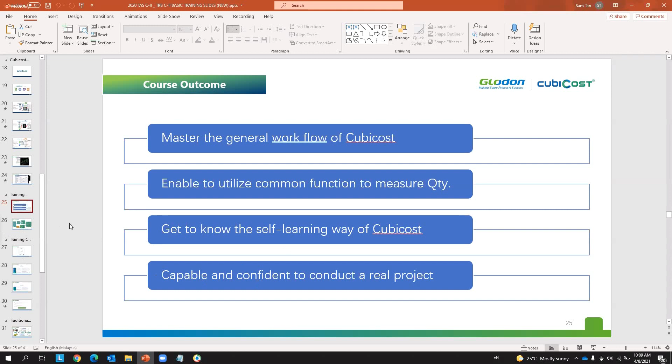Right. So for this 3 days training, our first day we will have the, there are some typos here, sorry, it will be TAS. We're going to start from our TAS software for the first day, and in the afternoon we'll do the main elements: column, beam, slab, or even wall. It depends on our progress. First day it will be TAS.

Second day afternoon it will start from our TRB, for our main structural elements. To emphasize again, the first day will be TAS until the second day morning. For the second day afternoon we will start TRB, and the third day will be a model submission. We need to remodel everything we learned today and tomorrow. The drawing will be the same that we practice for day 1 and day 2.

So for day 3, you need to create everything for the project from scratch. Create a new project and then do it accordingly. There will be some references you might need to see, for example, for columns, you need to prepare at least how many columns for that particular unit. And also we have some quiz. You will need to submit on the third day, and we will evaluate. We will provide you the certificate within 3 months.

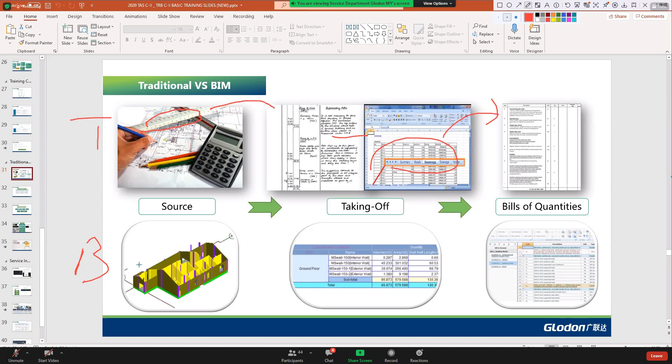Okay, how about BIM? For BIM, if you have CAD drawings, you can identify everything. You can do the model, or even if you have the Revit file. If some of the projects have the Revit modeler, you can actually import the Revit to our Cubicost software, and then the model is actually there. Voila. But we need to check

on the pattern of the BIM modeler model, because the BIM modeler is not necessarily the QS pattern. Some of the QS rules of thumb to do the verification will be missed out by the BIM modeler. Take example, if you have ground beam or frame beam, the concrete and formwork of the ground beam will take precedence. For frame beam, it will take until you see some steps back.

So some of the BIM modelers won't cater for that particular thing. It will just straight away draw the full length of the slab, for example. So you will have the wrong quantity allocation in ground beam or slab already. This kind of situation. So once we import it, we can do the necessary amendment. Then the software will automatically calculate the quantity if the SMM2 or MySMM calculation rules are valid. And then we can do the back linking to the BQ.

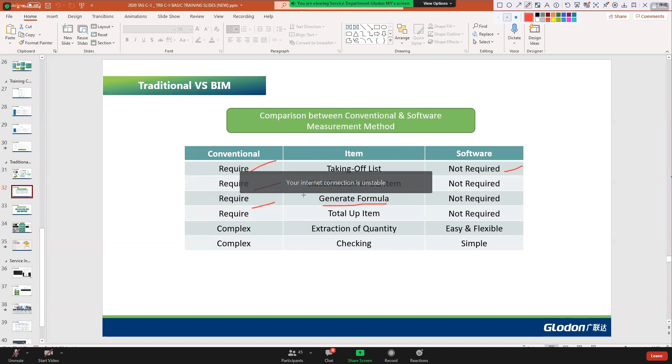required classification in BQ item. Conventional, yes. Generate formula, yes, for conventional, right? In Excel, you need to set your formula yourself, and software not required. Total up item, conventional, yes. Extraction of quantity will be complex for the conventional, quite easy for the software. Later I will

Excel sheets, and then which row, and then you need to double click and check the formula, and then find back your cell name, right? So that one will be quite confusing. For cross-check it will be quite simple. We have a reverse checking function for us to check. And also some benefits of using the software. I'm not going to say more.

Reduce the wastage during the construction. For the contractor, reducing the wastage will increase the productivity and also the profit for the whole project. Eventually reduce the wastage and high efficiency productivity.

Security wise, it means only whoever has the license is able to open the software. If this file is sent to a third party, for example a competitor, and the competitor doesn't have this software, he or she is not even able to open the file, right?

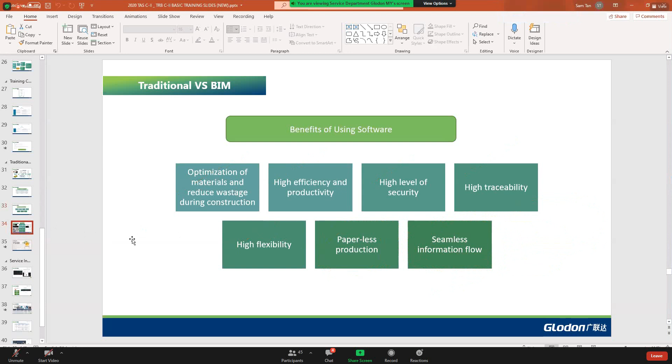And seamless information flow. Information flow will be seamless to everyone. Right. So we are coming to an end. We are going to operate our software. Before that, there are a few items to take note of. Every time in training, I actually want to emphasize this to my trainees. This slide is very important.

The first thing, you need to study the drawing. You need to know the drawing sources, whether it's IFC, Revit, CAD, PDF, or JPG. Each different type of drawing will have different methods for doing the modeling. I will show you later on what the different types of drawing and details are. It will be very important.

Categorization of the items. You need to know what elements you want to do. Type of rebar used, this is very important. You can check from our general notes. The whole layout plan, structure and architecture.

I like to describe structural engineers and architects as being like boyfriend and girlfriend. During, for example, a technical meeting, they don't like to talk to each other.

In some of the layout plans you will find there are some differences between the structural engineer and the architect. So you have to make sure which is the correct layout you're going to use and which one is the latest revision.

And general notes. I presume as a QS, you all know that before we start to do any measurement, first of all, we need to read the general notes carefully. All the generals will be uniform. For example, you will receive some layouts that say unless otherwise stated, UOS.

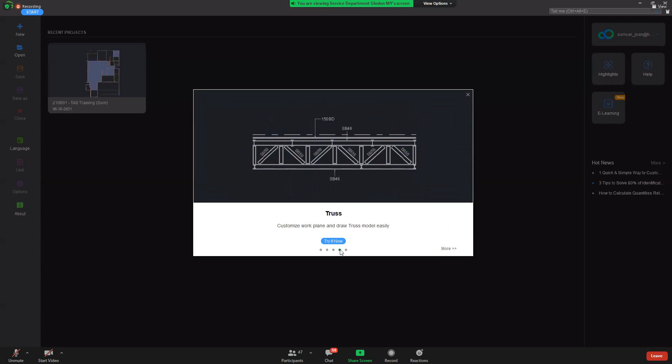And if you click on the highlights, you can see the e-learning. You can try the view function. Okay, we have some clusters, revision function, Revit changes, etc. Then you can click on more, learn more, right? If you click on this more, you have a tutorial. Okay, if you click on this help, it will go to something similar to a help desk.

Okay, if you don't want to click on this help desk, press F1. If you press the F1 key, it also takes you to that particular help center. Okay, and also this is our new one, the e-learning. This e-learning is actually free video, and in fact you go to our Glodon Teachable. Go to our Glodon Teachable, right?

So there is some hot news, some sharing on how to calculate the quantity related to site of the opening, tips, some of the identification, and what are the simple ways to customize that. Okay, so you can explore more on this.

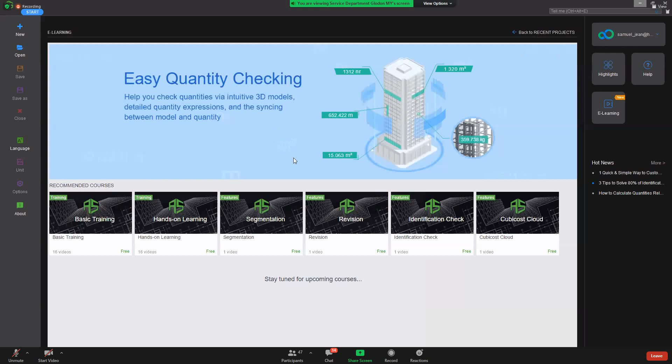First of all, what you need to do is create a new project, right? Everyone, please create a new project. Let us put today's date in full form, and in brackets, my name. Create the project name. Select the measurement rules. In your case, it will only have the Standard Method of Measurement second edition, right? In the temporary license. For mine, I have the MySMM. You use the SMM2.

Metric and imperial depend on your project. If your project is US or Taiwan or Indonesia... most of our projects in Malaysia actually use meters. Just remain as the default. And the ground elevation, this is what I'm going to explain to you further, because it's actually something to do with our excavation. Then we click on OK. Once you set your name, the standard method of measurement, metric, remain at 0 for the ground elevation, and then we click on OK.

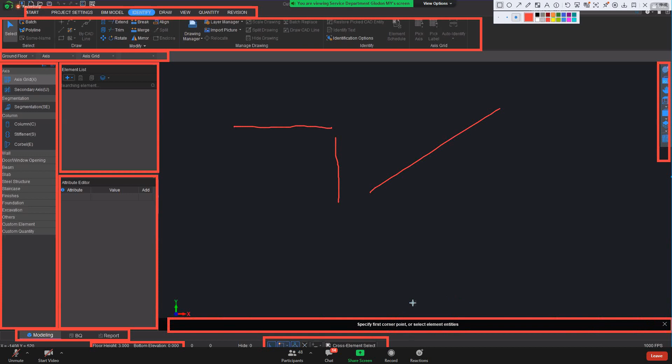We have this called the status bar. If you perform an operation, there will be a next operation step asking you to perform, so you can refer to this operation status bar. If you accidentally close it, you will come to this bottom area. If you want to open it back, just click on this blue color and it will come back open.

You will see there's 1000 FPS - this is what we call frame per second. The software is actually treated as something like gaming software, so it requires a certain quality of the graphic card of your PC. There will be some requirement on the graphic card, or also your PC RAM, etc., to run the software smoothly.

So let me go back to the start. I am able to save as, close, and set options as well. At the start here, let's go into the options. From here, there's one thing very important, which is on this file we will have

a backup, and also the auto save prompt. Normally I keep it on auto prompt, meaning every 15 minutes it will prompt whether you want to save the project, and I click yes. For training purposes, I would like everyone to save our project file on the desktop PC for us to find - save yes, and then the backup file. Once every 15 minutes it saves, there will be only one file created and updated.

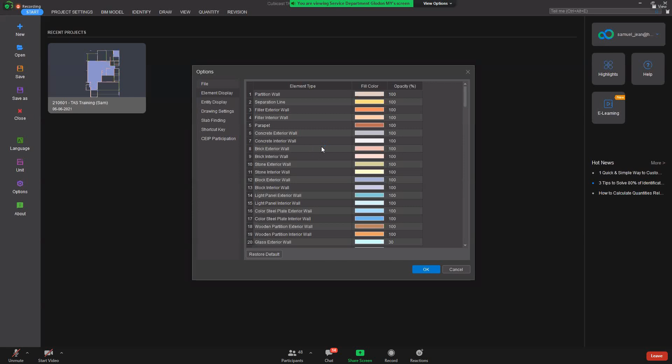Which elements will have default colors? Some companies have their own SOP - for example, they want walls to be orange color, columns to be maybe blue color. This makes it easy, so for every project there will be a similar thing, and the management or superior will be able to recognize this one as blue color, that one as another color. It depends on your company's SOP - feel free to adjust accordingly.

However, for entity display, everything - drawing settings, slab finding - by default everything will be reset in the software. And the first thing we're going to do is the project setting.

As I mentioned just now, I keep emphasizing - our project goes from left to right. We need to set our project information and our floor heights, and if we have our IFC, just now I mentioned, you still remember IFC, Revit, I can do it. And then for this one, this is where we can import our drawing, to identify that. For the draw tab, we're going to draw everything manually.

And after we draw the model entities, we can view them in 3D, 2D, faster 3D, etc. And then we can calculate and view our expression and our quantity mathematically. Later we're going to show you the function.

And in the quantity section, you will find measurement setting and measurement rules. So you will understand our setup - everything we set as M2, everything will be in accordance. You will ask me what's the difference between measurement settings and measurement rules. Let's open the measurement rules - measurement rules is somewhere that relates to the deduction.

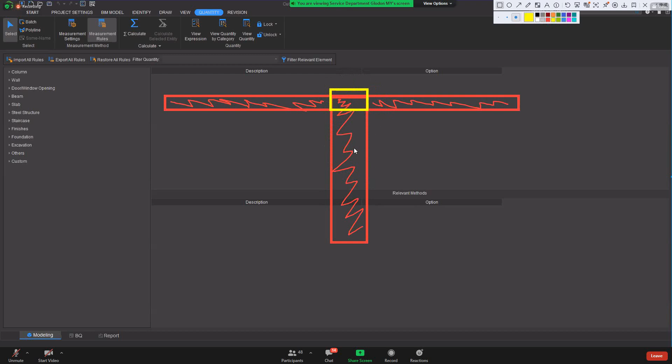Automatically in the software, for example for beam or slab, we will detect full volume minus this section. This section will be solely for the column. Remember, everything in the vertical element will take precedence.

So this is where you can set, for example, I open it for the column. You can see everything, deduction of the lining from the specific column. By default it will be according to the SMM, but if you want to change it, you're able to change it from the drop down.

Right, so let us try to set our project information first. In the project information, the project name and rule have already been set. You cannot amend anything already set.

Project code, let's say I put it KL001. If you click the project type drop down, you are able to see residential, factory, office. I'll put it as residential.

So you will ask, for today's training, what are the things, what are the models that we're going to do, right? Okay, let me write this down for you.

So for today, we are actually going to model a bungalow, which consists of a ground floor and a first floor. It's actually a rectangular bungalow, a rectangular shape.

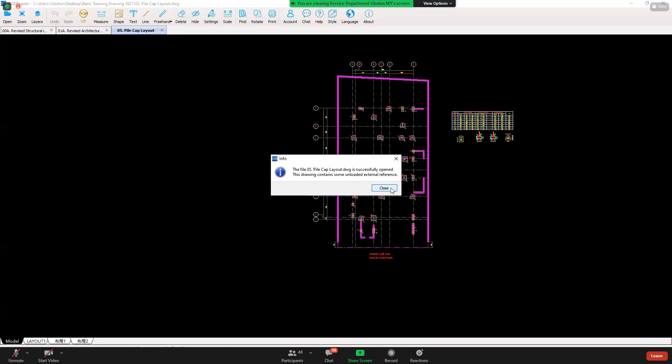For the foundation type, we are going to choose the pad foundation. If you refer to the drawing material, we actually have pile cap.

And the number of underground floors — we have one, which is our foundation floor, and the overground floor will be 1, 2, 3. Let us put 3. This is the brief information we can set, don't worry about that.

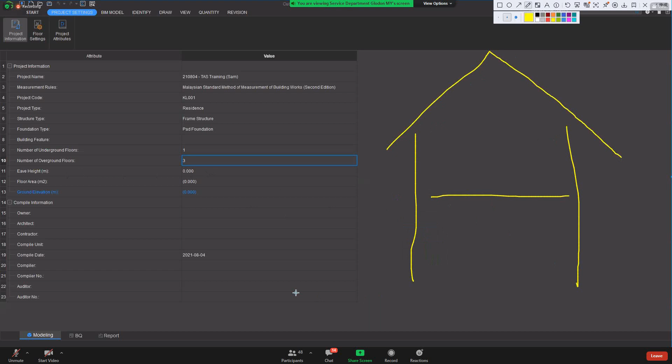How about the eave height? Let me draw it. Let's say this is the overall building roof, this is the floor level, and this is the ground floor. Eave height is actually the distance between the tip of the roof and the ground floor. This is what we call inside, right?

So in this, I'm not going to put anything because it carries no meaning for me. If you have the information, you can put it, but I'm not going to put it for the training purposes.

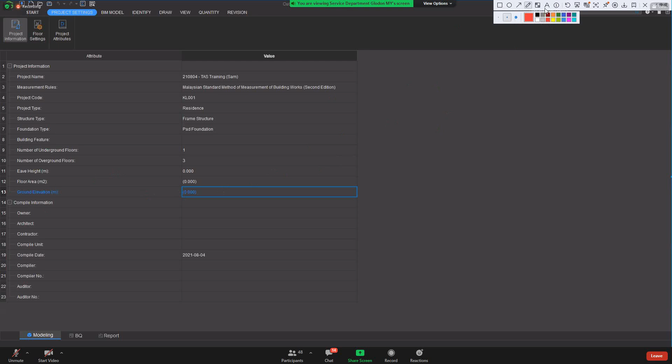Floor area as well, you can put it. And this ground elevation — what is this? This is actually a function for you to determine your excavation. This ground elevation is the starting point of your excavation level. I repeat, it's the starting point of your excavation level of the ground elevation here.

So for this ground elevation in the drawing, can everyone let me know what is the ground elevation for the project? Leave me a chat box, leave me a message in the chat box. Guys, let's guess, okay? What is the value for the ground elevation I need to set in the software?

Anyone? Is it 83.4 or is it 83.2? Okay, CE type. Okay, CE 83.2. Yeah, okay, yes, you guys are on the right path.

This 83.2 will be our ground elevation. Oh sorry, I just closed the autosave prompt. I think you all also at the same time will receive the autosave prompt, so just save it. Save the file on your desktop, easy for you to find.

For ground elevation, we put it as 83.2. And for the information, the owner, architect, contractors, compile unit, compiler - I'm not going to do anything there. You can also put in, for example, the owner will be this company as a class. Make sure the part is the blue color one.

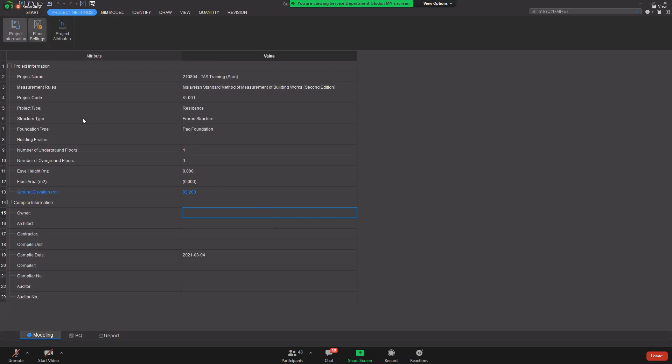For this floor settings, on the left hand side, this is what we play around with for zoning. Meaning to say, if you have a project - remember just now the condominium - I have two blocks and maybe a podium, I want to separate into different QSs to do the work. I can use this zoning, and then they can merge the file together.

So this one you can set the floor height and grid setting. Remember just now the item for you to take note: you have one thing we call general notes. As per your project, if the general notes on every element, please follow accordingly to fill it in, so that you get the information accurately.

So for the first one, let us see what we have. We have one foundation floor - this architecture building is going to provide foundation floor, and we have ground, first, and roof. So how can we set it? By default, the software will have foundation floor, ground, and first.

If you add this, click on insert floor, it will insert the basement floor. If you want to delete, you need to click on this basement one and click on delete. You are unable to delete the foundation floor.

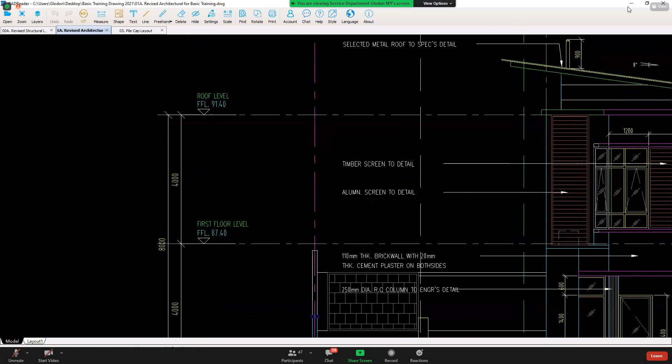I add minus 1.5, I will become 81.9 meter elevation. Let us cross-check - the most is 91.4, which is correct. So remember the elevation.

When I come to elevation, some of you might be confused. Later on they will actually see the entities - they have the entities elevation, top and bottom elevation. What did that mean? Let me show you a diagram for you to visualize.

Remember just now, for example, ground floor is 83.4, and the 4 meter height of the floor, it will be 87.4. This 87.4 will be the first floor bottom elevation, and it's also equal to my ground floor top elevation.

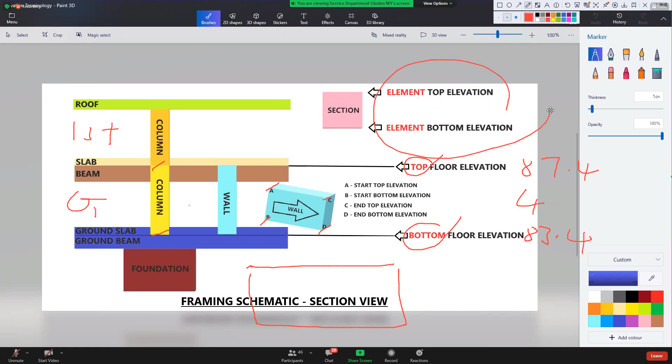Okay, we have a question from Wong whether we need to change the floor height for the roof. Right. So for the roof here, because the roof floor will be our last floor, the floor height carries no meaning. You just remain at 3 meter, because the roof floor will be our last floor, so there will be no other element on top of it.

Okay. So another part is this one, the grade setting. As per the general notes, you can set, for example, concrete wall is grade 40. Okay, I need to change to grade 40. There will be a different color indicated. You need to change this. And you can change the concrete category, the small work type, and also the mortar grade.

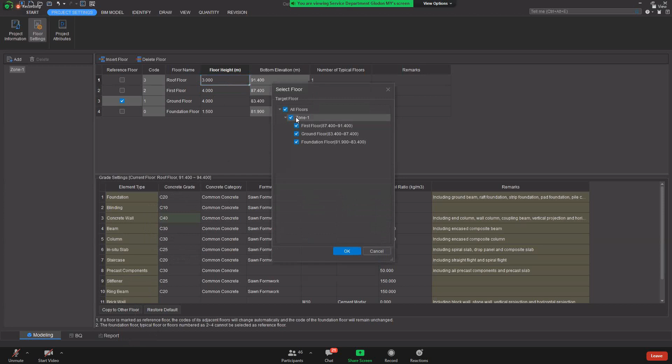And then, for example, now I'm changing the roof floor. If it's applicable to every floor, I just copy to the other floors. I select every floor and I click on OK, and then every floor will be the same. So for this grade setting, there's nothing specific for you to set, don't worry about that. Just sharing with you the function that you can use. If you want to restore the default, you just click on restore to default.

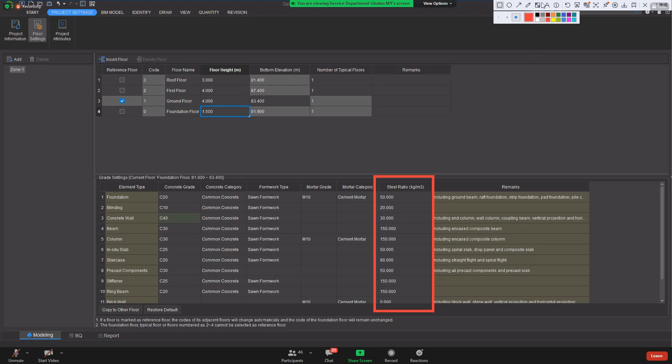Steel ratio here, don't get me wrong, is actually an estimation, a guesstimation of the steel weightage derived from the total volume of concrete. Right? The cube. So if you get the total volume of concrete of the element, you times it with the steel ratio provided by the engineer, and you get a rough estimation of the rebar tonnage, the weightage.

Okay. So once we're all set, the first thing we need to do is import the drawing. Currently we have our drawing in our import folder. Firstly, we click on this drawing manager, and on the right hand side there will be a drawing manager and also a layer manager. I like to open the layer manager together.

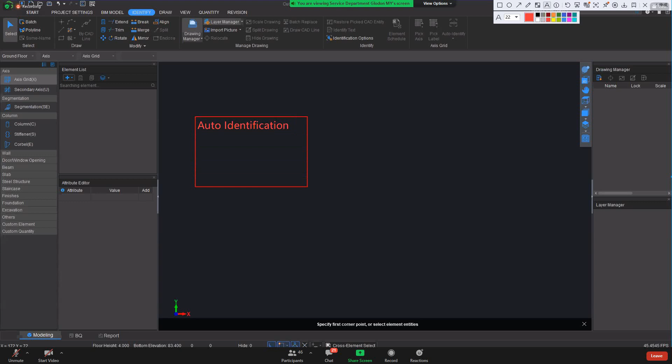I'll explain the manual model first. In the manual model you need to create, for example, a column. You need to create the entities for the column: for example, the name, and then you put the length and the width and also the thickness of the column, and then you use the point function to place it according to your drawing. This is what we call the manual way.

The auto identification way will be very straightforward. Later I'm going to show you the operation steps. It will be only 3 steps: you need to pick the axis, pick the label, and then the auto identification. Okay, I'm going to show you these two.

So before I start, we need to have our drawing inside our software. So click on the drawing manager. Everyone, please click on the drawing manager. It will appear on your right hand side here. How do you add the drawing? You click on this. Some symbols you may not be familiar with. You can just move your cursor to that particular symbol and you will get a prompt saying it's actually add drawing in this case. Click on add drawing.

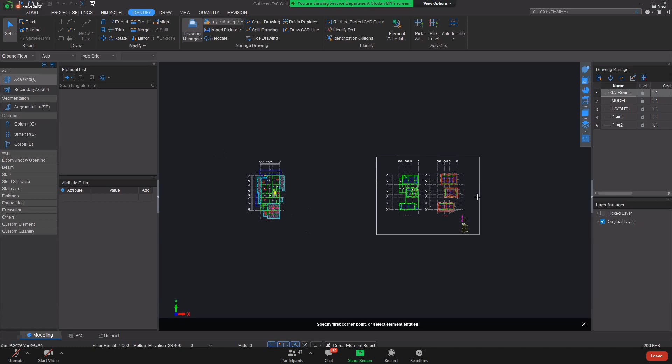While you are downloading, let me explain to you. So we have these three different types of layout. The first thing you need to do is split the drawing into individual floors. Why do I need to do it? I'm going to explain to you. Once I split it, I will have my axis grid line. Later on I will show you the axis grid line I created here.

For example, once I split this one, this one is the ground, this one is the first, and this one is the roof. I will need to relocate the drawing to the exact coordinate, to the exact point here. So for the ground floor, I will have the x and y axis, the axis grid, and the first floor I also relocate to the same location, and the roof as well. Meanwhile, the axis grid line will serve as a baseline for us to do the model.

Meaning to say, if I do the model and I separate it into sections, my ground, my first, my roof, if I didn't have my axis grid line and I didn't relocate my drawing to the appropriate axis grid line, what do I do for my vertical element, for example, a column? If I don't have the axis grid line, I have no point, I have no benchmark to relocate it. So my column will be out of position.

For example, let's say this is C1 and also this is C1. That will be totally not making sense, right? So what we need is to have the axis grid line. The first thing is split the drawing, and then we relocate the drawing to the axis grid line, and then when we do the model for column 1, we will have the same verticality for the C1. This is the result we want. We want to see if the model is reasonable or not.

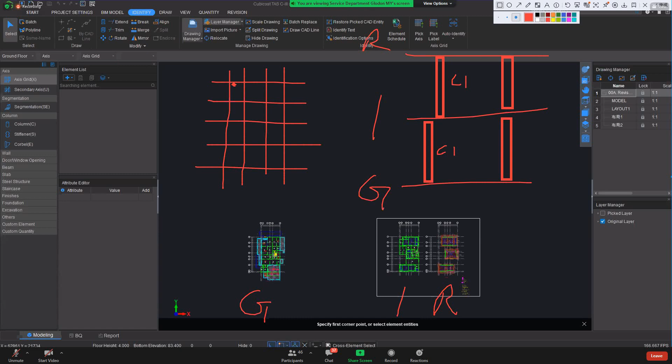Okay, if you're clear on the purpose of the process I'm explaining just now, from splitting the drawing, then creating the axis grid line and relocating it, the ultimate outcome is to get the verticality of the vertical element. Please leave a yes in the chat box. I want to make sure everyone is on the same page and everyone knows the concept of this modeling. This is very important.

I have actually encountered before some users who don't have the axis grid line, so when they do the model and you see the 3D, it will be messy every time. Right? Okay, nice. Everyone is on the same page, right? Correct. Okay, so let us zoom out.

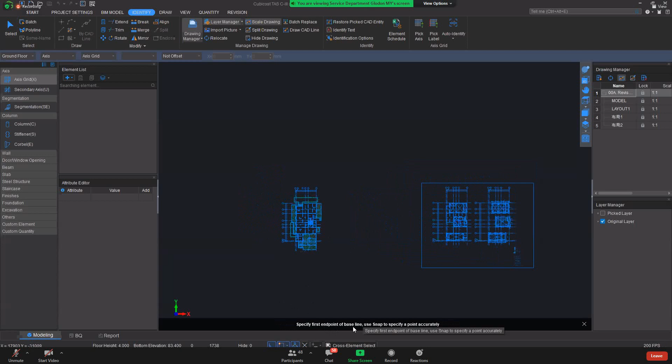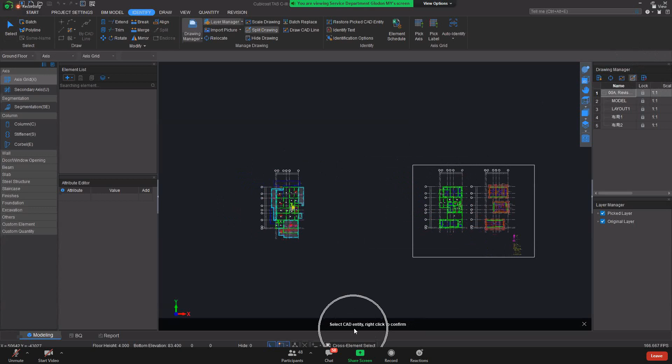Once we're done scaling, the next step is very important: we need to split the drawing. Let us click on split drawing. Similarly, refer to the status bar, which asks you to select the CAD lines. First, zoom in. I left click, hold, and drag over the whole layout for the ground floor. It becomes a yellow box, and all the CAD lines are highlighted in blue. Then right click to confirm.

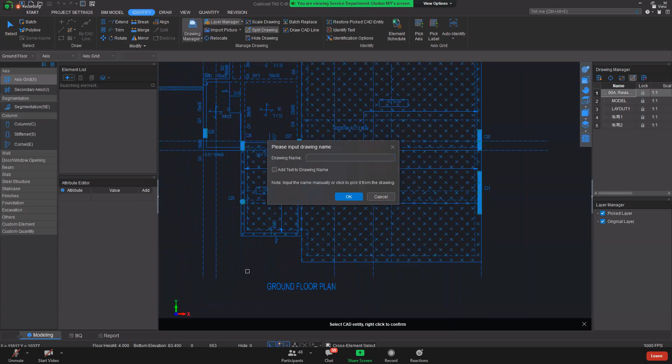You will come here to input the drawing name. You have two methods. One is you can manually type it, or if you are smart enough, you can just pick it from the drawing. There will be a name, ground floor plan. If I move my cursor here, there's only one square box. If I move closer, it becomes two square boxes, which means you are able to identify the information. Then I just select it, and it will be ground floor plan.

But at the front here, I need to put structure. I put STRUC because this is our structural ground floor plan. If I just put ground floor plan, later on the architecture drawing we also have a ground floor plan in Cubicost.

So once we identify the ground floor plan, we move our cursor to correct the structure item, and then we click on OK. Once you've done one, it will become a red color box, and one drawing is added to your drawing manager. It will be in structure ground floor. Right? Can you see? It will be in structure ground floor.

Alright? So similarly, let us practice for another two. We will also have this roof floor and also upper roof. You might ask, we have first floor, why don't we have the first floor for the layout? For this training, our modeling assumes our ground floor and our first floor entity are actually the same. Okay, so let us practice more.

Let us split. So click on split. Make sure the status bar asks you to select. Select the CAD line. For this one, I just select, right click, and then I zoom in, identify the name, and then I put in STRUC, naming the structure. OK. Similarly for this one, for the third one.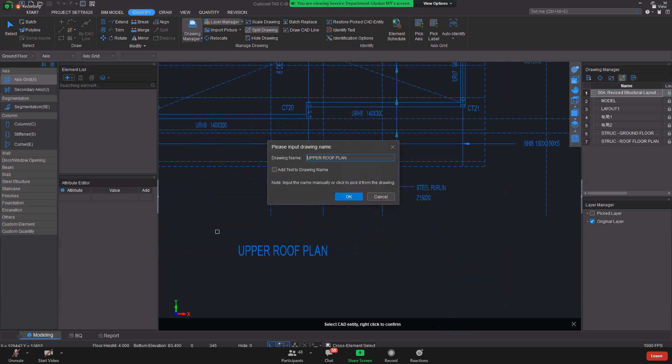So you will ask, do I need to split the information below here also? Either way, you can also split, because we split the drawing because we only want the layout. We only want the model, the entity position. Either way, you can just... done split at the drawing manager. Okay?

If you already split your drawing, let me know. Give me a message. Split all these three drawings. Three layout drawings.

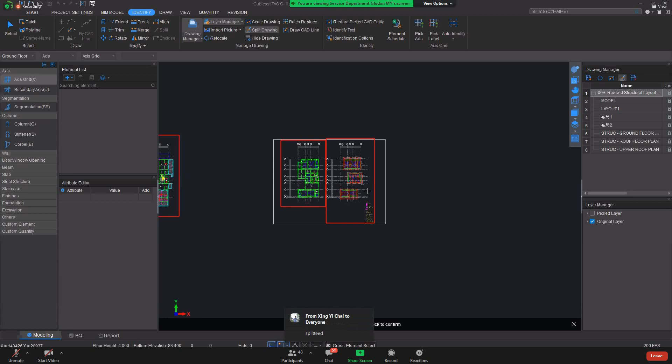So, if I am going too fast or you want me to repeat, please stop me. But I'm going to go to the first and very important part, the backbone. And we split there. Okay. I'm going to repeat the split now. One moment.

For this one, let me remove the drawing now. So for the split part, remember we have three drawings in the same layout. I need to split them into individual layouts. First of all, I need to zoom in and select split, the fourth button, click on it. The status bar asks me to select, right?

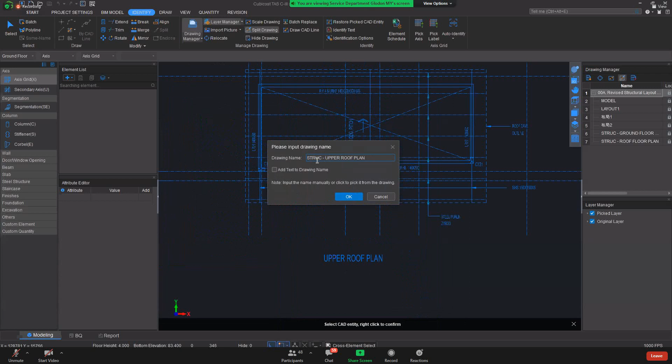I just left click, keep pressing my left click and drag my mouse to make a yellow color box, and then right click to confirm. It asks you to input your drawing name, and then I zoom in, identify it, and rename it as STRUC, structure, and then click on OK. It will become structure upper roof. The drawing will appear in your drawing manager. Right?

Oh, problem. Unfortunately, we are not able to rename the drawing. No worry, if you didn't put the structure in front of the drawing name, later when we split our architecture, just remember to add archi in front of the drawing name, so you are able to differentiate. No worry. So you can delete and split again.

Yes, you can do so. If you don't want to do so, never mind. Later when we split the architecture, we just add architecture, architect ground floor plan. Then we will be able to differentiate archi and structure, right? No worry. So I will go to the next step, the backbone of our software.

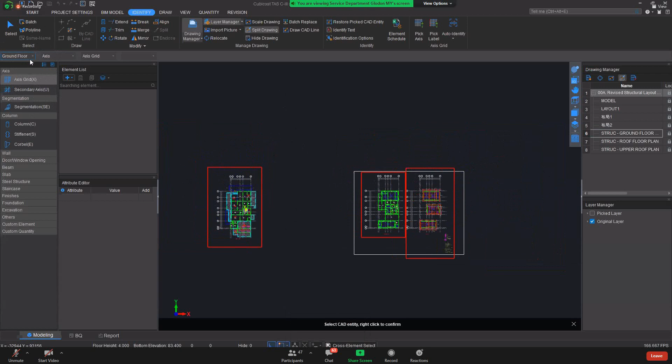The first will be our axis grid. For this axis grid, remember our navigation tab, we are at ground floor. On the drop down, you are able to see four levels in our floor setting. We are on the ground floor. For axis grid lines, if you create one axis grid line for the ground floor, each and every floor will also have a similar axis grid line.

So first we need to double click on this structure ground floor. Once you double click on it and zoom out, you can see only one layout. This is what we want. And the axis grid. I'm going to show you a very manual method of how we can draw our axis grid.

First, I mentioned just now, we have auto and manual. I'm going to have a blend of these two. Let me practice, okay? Let me familiarize. First thing, this is the manual method. We need to have our draw tab, because the auto identify method is depending all on the drawing. We need to identify that. Everything is manual, go to the draw tab.

We will find similar things to select, draw and modify, but the behind will be totally different. Into axis, and the draw tab. Axis grid line. I can create these various types: orthogonal, arc axis, and also diagonal axis. For this one, it will be rectangular, so it will be our orthogonal axis. Let us click on orthogonal axis.

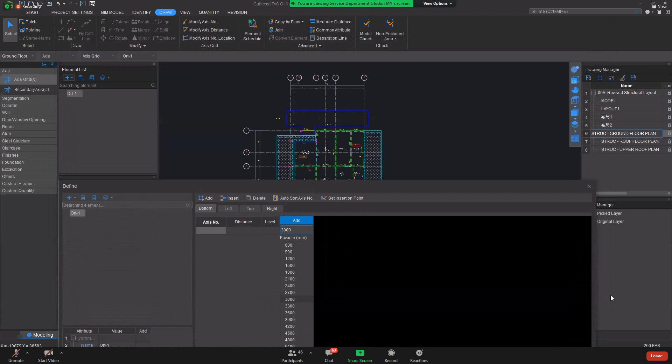If you click on orthogonal axis, you will come to the define interface. This is the interface. Let me put it down and explain to you. You will have top, left, bottom and right. It actually indicates what is the axis position you want to put, the label. From here, this one will be our top, and this will be our left. This one will be our bottom, and this one will be our right.

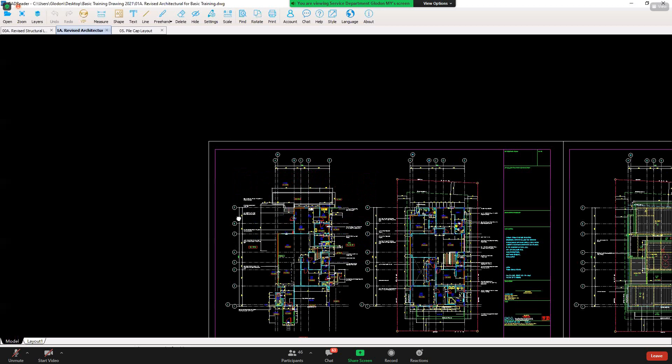On the plan, the location is set. From the drawing here, it's actually at our top and our left. So let us go back to this define. From left, we need to click on the left here. We can just click on insert. From left, from the drawing here, I need to see. So from left, actually from 1 to 9.

If you have the drawing with you, okay. If you don't have the drawing with you, I need to refer one by one. If not, you can just refer to my screen here. From axis, I can double click. I can change 1, 2, 3, 4, 5, 6, 7, 8, and 9, like 1 to 9.

The first one is 450, and then 4550, and then we have 4000, 1800, 2500, 4500, 2500, and also lastly will be 3950. So you can refer to my screen here. You can straight away directly input to your left axis from 1 to 9. So I refer to here.

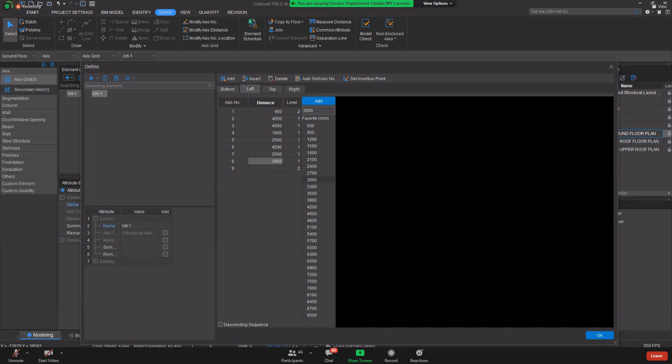Next we're going to do our top. So for the top, we go back to the top here. Similarly, we're going to add. Once I click on add, you will see from 1 to 9 you will have the diagram for you to see. This one is actually A, and A1, B, C, D, and E.

It depends if you are referring to architecture drawing or structural drawing. For architecture drawing, I have A1. For structural drawing, you have A1. No worry, actually similar. The total will be 12,875. So 1,800 and also the 5,000. For this grid line, I will normally ask you guys to use the manual method, to do the axis line so you are able to visualize.

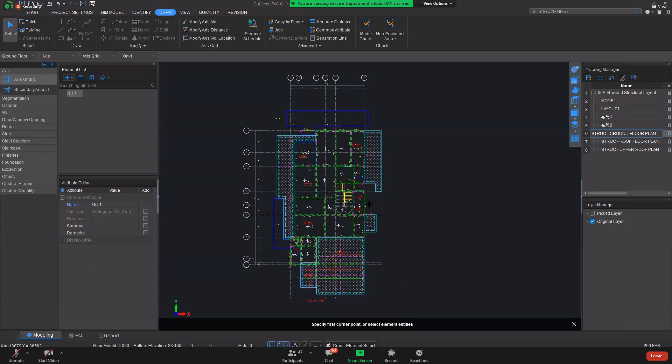5,000, 6,000, and 5,000. And I have A1. If you don't have A1, it will be straight away 4,475, 1,600, 1,800, and 5,000. Once you are done, you just click on OK. Once you click on OK, you have this green color created in your drawing panel.

So still remember just now what I said. After we split and then we create the axis grid line, our backbone, our benchmark is our axis grid line. The next step, we need to relocate. Right? We need to relocate.

Okay, we need to relocate. So everyone able to have the axis grid line shown in your draw panel? If you have the axis grid line, let me know. Yeah? Axis grid line, axis grid. Yes, alright, yes, yes, yes.

Okay, the next thing will be relocate. How are you going to relocate? There are a few things I would like to emphasize. You will see this is our random point. When you want to relocate, make sure you are actually off. If you are on, later I will show you the consequences. Make sure everyone is off the random point.

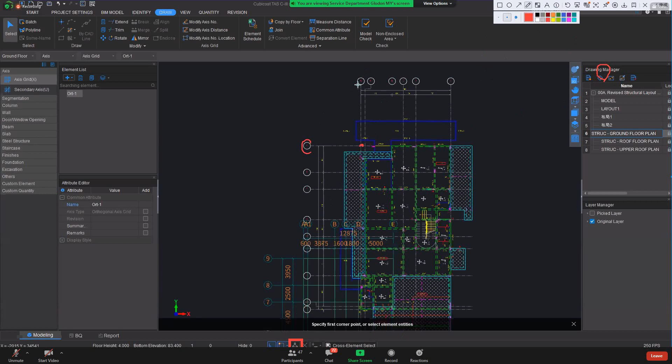And then we are going to select this relocate, and then we're going to select the base point. For example, I have the intersection between 9 and 8. I have the intersection point here. I click on it, and then I drag to our intersection point of the axis grid, 9, 8. This is going to be the steps here. So let's do together.

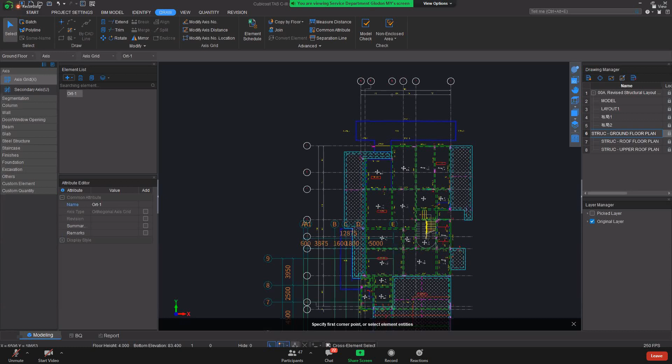So let's do together. Alright, if you're able to do so, it's good. Okay, let's see, I give you an example. If I open a random point, I actually open a random point. If I click on relocate, okay, if I click on it, make sure you have the marker, okay, you have the cross here.

Okay, if I open the random point, if I didn't zoom in correctly, if I didn't find it, if I carelessly just put it here, then you will see something is having a problem. By layout, axis grid, my axis grid is actually not aligned. And if my first block, my axis grid and my drawing is actually aligned, I don't have to edit anything.

So things you need to validate here: you need to off this axis, you need to off this random point. I do it again, from the random point, from this point, and then I'm finding it. Then it will be aligned together.

9, 9, 8, A1, B, C, D, E. Okay, so are you able to relocate? Yes. Right, so we are done, we are done for the preset. We are done to do the preset, the first part, which is what you need to do before our lunch.

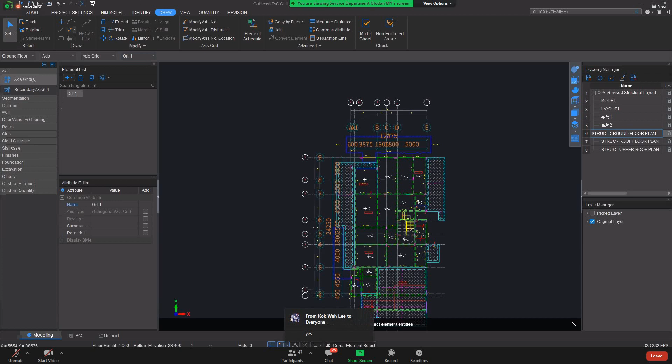Okay, we are going to do for column. For column, are you guys ready? Are you guys ready? Yes? Alright, yes, thank you for your cooperation. Before I go further, okay, nice, if your axis grid line and also the layout is set accordingly, very, very aligned, very nice.

First thing you need to do is the column. Similar thing as the axis grid line. From the drop down, if you want to collapse, if you want to confuse yourself, just close the axis. And then for the column, open the column. First one, the column, I'm going to bridge you through how you can do the manual method.

Similar to the axis grid line, for the manual method you need to create - you can create the rectangular column, round column, irregular, or parametric. In the software, if you see anything related to parametric words, it will be the shape actually preset in software. And then you can input the value here. This one you can use it, right?

Or even you can actually use the irregular column. This irregular column is very useful. Example, if you have the AutoCAD drawing, you can actually select the section from the drawing.

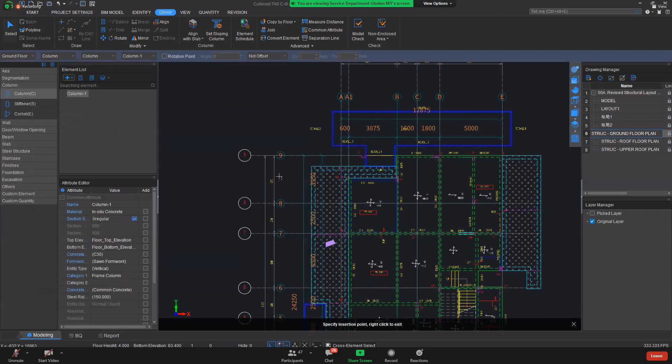Let's say, for example, I draw the section, and then I can find, for example, this one. You don't need to draw together with me, I just show you the function of it. Okay, let's say I have this one, so you will see I already have, and then I just point it. So this is the function for the irregular.

If let's say you want to do the manual method, the first thing manual method you need to create one. Let's say C1 is a rectangular, right? Create a rectangular column, click on it. Okay, once you click on it, you will see.

Let's say just now I mentioned to you, each of the element, the entity, you will have the attribute editor. From the attribute editor, I want to strengthen one more concept for you. You will see the software will be in white color. There will be two different colors. For my one, if you can see here, the name you have a blue color and white color for my case.

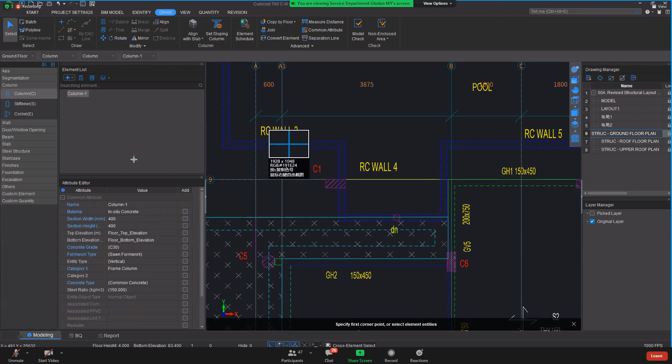For the blue color is what we call a public attribute, meaning to say if in the model here I have 5 numbers of this column 1, if I change the information of this public attribute, it will change accordingly, it will change top. If I change information for the other one, this is what we call private attribute - the remaining color is what we call private attribute.

This private attribute is when you want to change the information here, you need to select the particular entity first. Only then are you able to change the information, and it will change accordingly. Let me take an example for you.

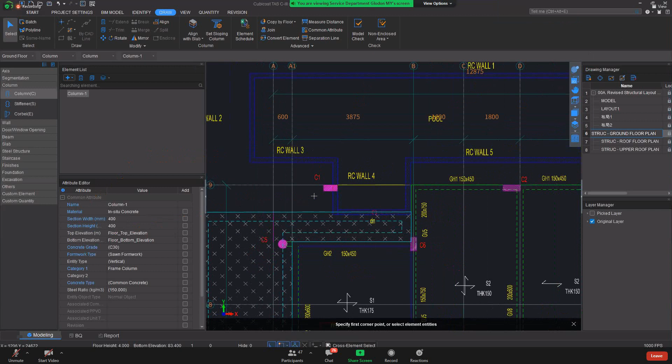Let's say I have this 1, 2, 3, 4, 5. If I change it to maybe 300, 100 by 100, you can see it changes accordingly. If I want to change this particular thing for the private attribute, we will only change one particular thing.

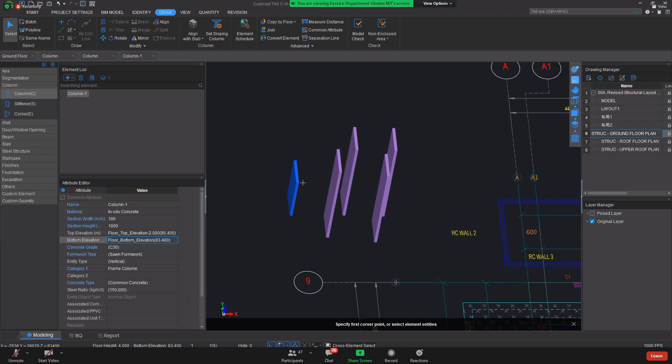There will be a difference between public attribute and private attribute. Private attribute is for you to customize that particular entity. The first thing you need to select the entity first, only then can you make the changes.

If just now you were actually testing on the software, you are creating those entities by enabling the point. There will be the function of this random point. If you close the random point, even though I want to point it at any location, I am able to do it. I need to have a drawing with a snapping point.

With a snapping point, you will see you are able to point it. If outside the drawing, you are unable to draw or point it. If you open the point to wherever places, you are also able to point. This is the reason I'm not very encouraged to open the random point.

So let me come back to the topic. Let's take for example this manual column C1. You need to rename the name to C1. Also set the material and the section.

If you see the concrete grade, the formwork type, all this is actually what is set in the grade setting, the concrete grade. So you will see what is the linkage between this.

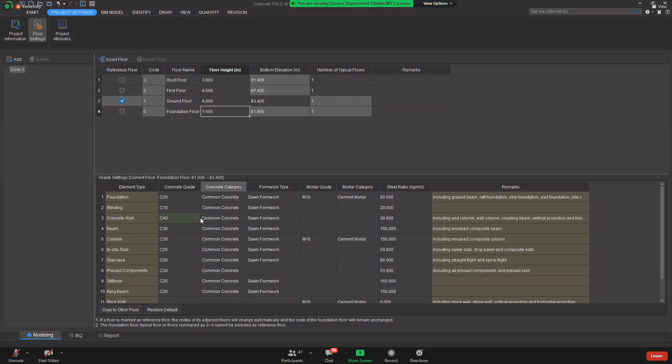Meaning to say, whatever I have in the general layout, general notes, I will need to set here. And in my layout drawing, if I see there's no unless-otherwise-stated wording, I don't need to change the grade because it will follow the general.

At the first place, if the grade setting is set as per the general notes, we will define it differently. If for every entity you need to change the grade - let's say this general note is grade 40, my grade 40. By default, if you check the grade 40, here we will show grade 40 by default as per the general notes.

So come back to here. I need one thing, I need my column details. Let me see my column details. In your training material, you will have a column detail. For example, this C1, you have 450 by 200.

Everything will be done. You still remember just now I said the elevation, top elevation and bottom elevation - this one I'll explain to you later on. Just try to create this one, and this is points. For the column, it will be very easy.

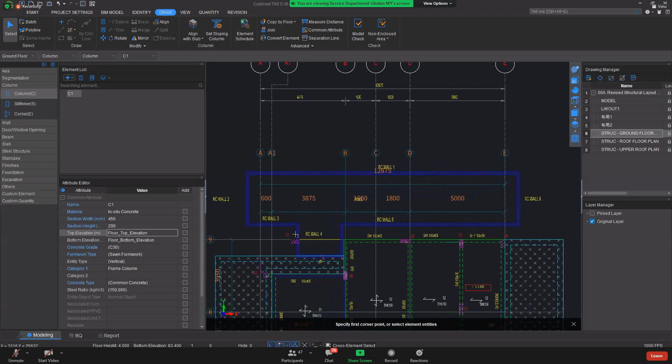You can use one function only, which is this point. Click on it. Zoom in. You will see by default it's in the center. It's actually hard for us to get the snapping point.

All we can do is click on F4, which will be our shortcut key, to change the insertion point. Let us click on F4 to try out. You can click on F4, you can have the snapping point, you can get the corner bar, and then you click on the corner.

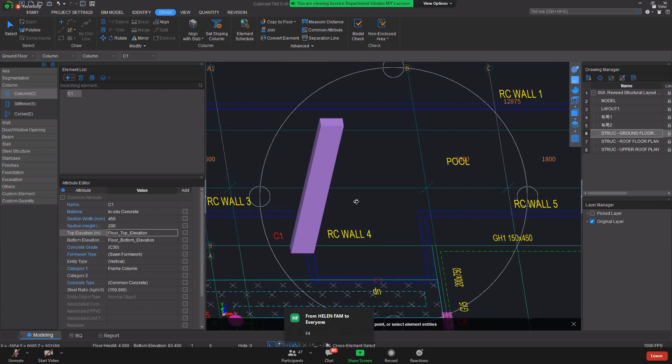Everyone, let me know what is the height of this column C1 that I just created. Can you give me a message - what is the height of this C1?

Make a guess, everyone. The answer is the floor setting. Okay, some of it is 4, some is 3. The answer is 4 meters.

Why? Because currently we are at ground floor. You remember the top elevation will be this top, and the bottom elevation will be the bottom. So the bottom elevation is our floor bottom elevation. Remember, we are in ground floor, and our ground floor bottom elevation is 83.4. And just now what we said, the height is 4 meters. And the floor top elevation is 87.4.

So you can see the concept of the floor height come into place, the function. So let's clear it. Function is 4 meters.

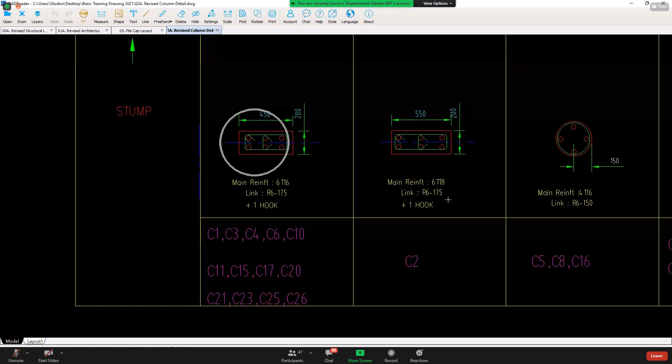So let me go to another method. There's another function for me to do the manual method. Also, if you see the C3 from the detail, it actually carries the same information, 450 by 200. But the position is changed. What you can do is you don't need to create another rectangle, because if you create a new one, you need to re-input the value.

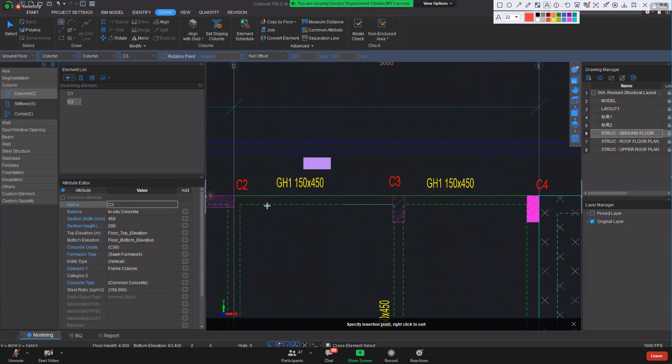You can just click on copy. By default it will be C2 in accordance, but I want it to be C3. I want to put C3 first, and also it's 450 by 200. If you copy the information, by right it will stay as is. What you can do is just change it to become 200 and also 450, since it's not 450 by 200. If you don't want to change, also never mind.

You can just similarly draw using that point function. You will see there is a rotation point. The difference between rotation point on and off is: if I don't open the rotation point, I just need to call the function and click one point. If you open the rotation point, it's able for you to change the direction of the axis. Everyone please open the rotation point, and then we can press F4 to change the rotation point. Okay, currently at this point.

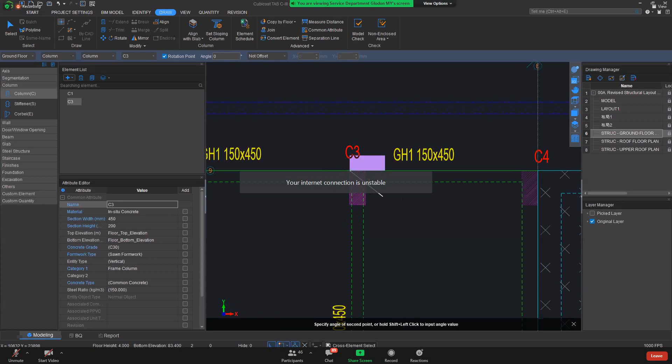I want to point 2 points. The first point I need to point here. Okay, and then the second point - I just open this rotation and move it to the second point. It will be the second one. If you're able to use the rotation point to point the C3, give me a message C3.

Here comes the concept of the automatic method, and I'm going to introduce you a very, very interesting thing, a very interesting function. Once you see it, you're quite happy to see it for your future takeoff. This one is what we call the automatic method.

The operation I explained again: the first thing, create entity, then we input information and use the point function to point it. You want to change the direction using the rotation point to point it, and use the F4 function. So the second method involves everything related to drawing I mentioned just now.

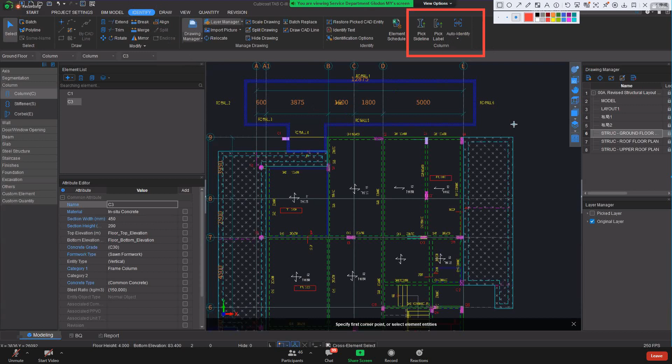You go to the identify tab. For each of the elements, we have auto identify. Everything is related to this. We have a few things to do to identify, to auto identify.

You will ask me what is sideline, what is label. For example, in your drawing, you will have your line - this will be a line, for example a column line. So if you click on this pick sideline, that is the sideline. The first step you want to do is this one: you need to pick the sideline here and then right click to confirm. Second part is pick the label - this is our column label - and then right click, and then click on auto identify. So this is the three basic steps.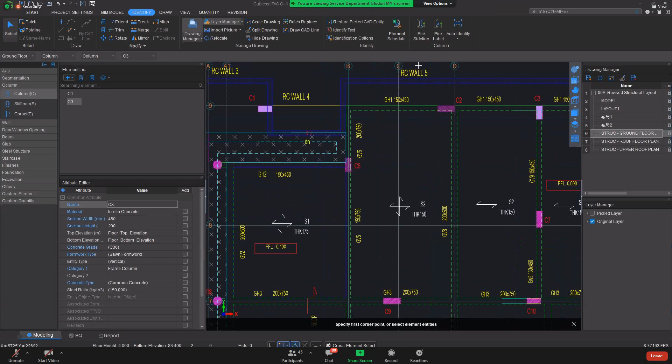So let us do it together. Our first step: come to this identify tab. First thing first, click on pick sideline. Once you click on this, you will have this box come out.

By default it will be select by layer, meaning it will ask you to select the layer of the drawing. If you select the sideline of the column, every element - for example wall, beam, slab - everything gets selected. This means the draftsman of the consultant is actually lazy, or maybe they don't have much time to do the drafting properly for the algorithm. By right, as I mentioned, draftsmen have to have each different element with their own layering. So if you select one particular column sideline, everything gets selected.

You need to separate out each different element. The next thing you might need to do is select by color. And you can see you have different colors for different elements also, right? So there's a second function, or maybe the third one, the free select. You can select one by one. This one will be bare hand already.

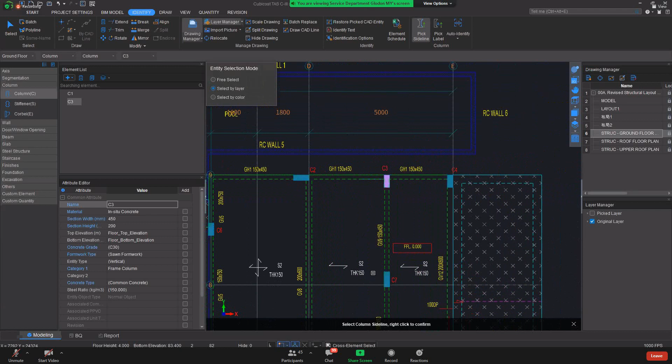Okay, so if I come to this interface, select by layer. First things first, you zoom in. For example, C2, I just click on the side line. Okay, you will see the double square box. I click on it, and then I zoom out. Don't worry about that. I zoom out first. You don't press anything yet. Zoom out, you can see all other columns being selected. It will become this blue color, right? And then

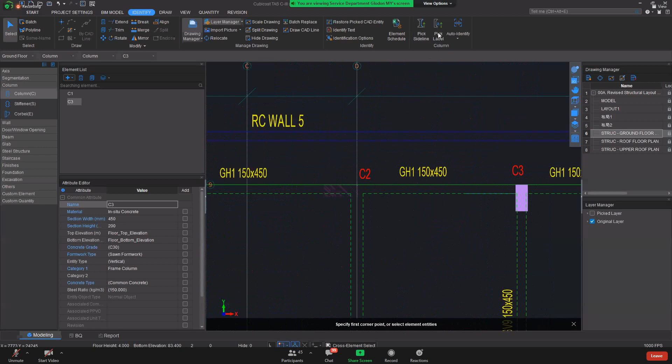Okay, once done, once you right click to confirm, second step you need to pick label. Let us click on pick label. Similarly, by default is select by layer. Let's say I zoom in, I click on this C2. Left click, and I zoom out, I see each of the other labels is being selected. And I right click to confirm. And then you will see the side line and also the label is missing. Don't worry, I explain to you further later on.

After it's missing, the next step, you can just click on auto identify. By default, you will have three functions. You have auto identify, click identify, and drag identify. Auto identify will identify everything that is not identified. Click identify, you will identify the things that you want to click. You point, you select what to click. Or drag, you can drag the portion you want to identify. For this case, I just click on auto identify.

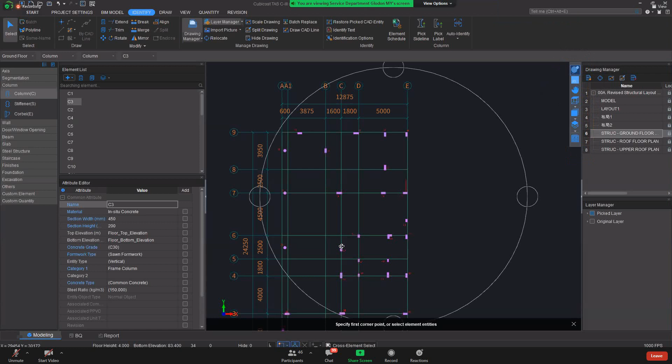After you click on it, there will be a prompt. Identification completed with 32 columns identified. You click on OK and you zoom out. If you want to see your 3D, this is the view tab. From the right hand side here, the first button is the view tab for the 3D. The second is back to 2D. Let us go to 3D, to view the column being identified and modeled up.

Everyone, are you able to also identify all the columns for the particular project? If yes, leave me a message. Alright. How do you guys find this function? Is this function tremendously rapid, interesting, fast? Yes? Smart? Okay. Right. So this is how you can do the auto identify.

So if you wonder why my drawing is gone, everything is gone, don't get shocked. Come to the layer manager. I explain further. Currently, after you identify, you don't see all the other side lines. In fact, in layer manager, we have two things. We have picked layer and original layer. If you click on this original layer, it will come back empty.

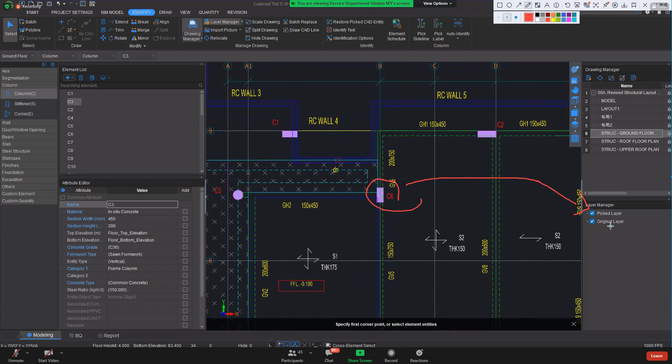If you untick the picked layer, then you will notice that the column side line and also column label are hidden. What it means is throughout the identify operation just now, you take the side line and label, and it will fall under the category picked layer. It is no longer the original layer. So if you untick it, you won't be able to see. If you untick everything, you see nothing. You just see the axis grid line and also the entities that we modeled just now. Right?

If you want to go back to the model, or do another element later on, you see every element in column has a bracket. This is C. If you press on C, this is a shortcut key for you to hide your element. Later on we have a few kinds of elements where we will use this function.

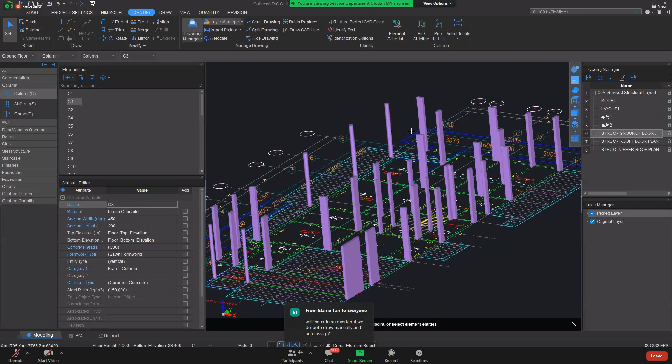Before that, will the column collide if you do both, draw and identify? It's a good question, Elaine. Just now I explained to you in the manual part, I used C1 and C3, right? As you can see, for whatever we identify, C1 and C3 already have. And in fact, the remaining one is actually at the bottom, at the element list here. And it won't duplicate. Okay?

Once you already have the quantity, you have the model at the back, it won't actually generate again for you. But it's a good question. It won't generate. It won't duplicate for you. Okay? So don't worry about that.

So a little bit of recap before we go for lunch. This morning we created a project and input the project information. Our floor setting, as I mentioned just now, is very important, because just now the column we put is C30. If our variable is C40, then we need to create them one by one, right? So better for you to have your variables input according to grid setting and also use floor settings.

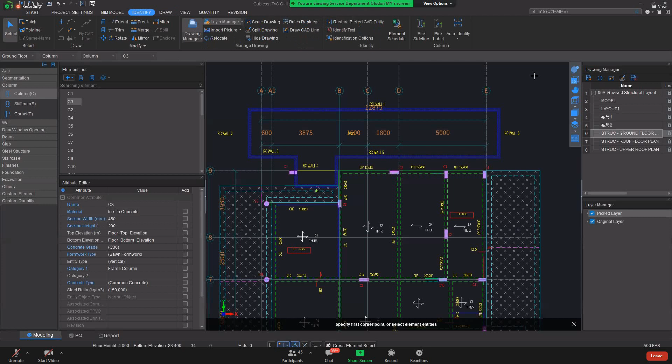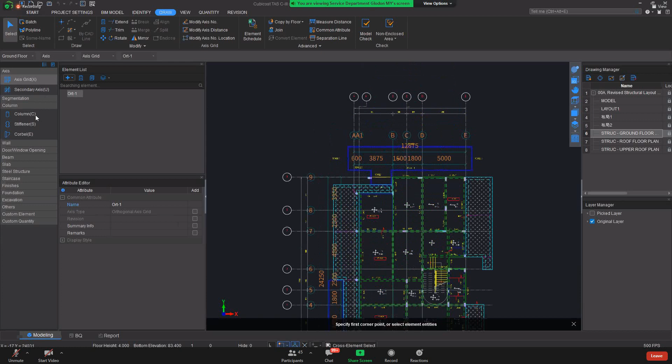The function to check the insertion point is by pressing F4. Once again, F4. And we learned the auto identification method also. Three steps: we pick the sideline, pick the label, and auto identify it. And voila, all the columns are identified. And the layer is actually in the pick layer already. So, yeah, that's it.

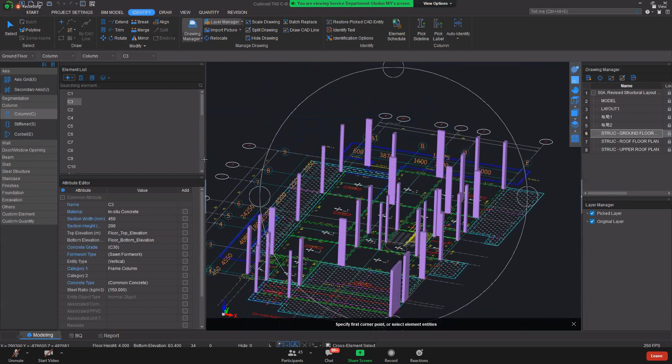So before we end for lunch break, can you see how to hide the elements? So for example here, you can see we have a column. And the column has a bracket C. Just press C on the keyboard. It will be hidden. It will be hidden. Alright?

Okay. So Vivian. Alright, Helen. Vivian asks, if there are some irregular columns, can you use auto identify? Yes, Vivian. As you can see, the C14 is in fact irregular. If you read your sideline, whatever shape your sideline is in, drafted in AutoCAD, you will be able to identify it. Coming back, I will explain to you the auto identification and the main things you need to take care of. So yes, you will be able to auto identify irregular columns.

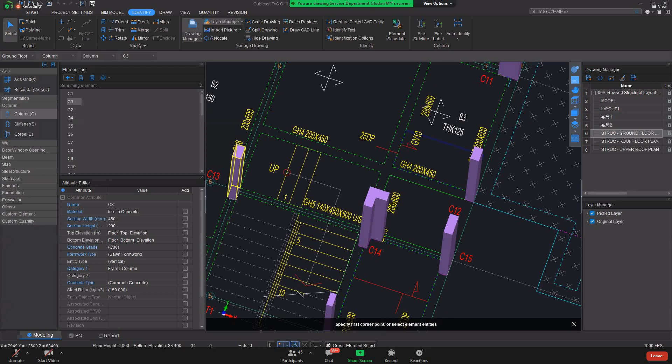So I think we're going to stop for our break. Please come back at 2 sharp. I'm going to start the next item, which will be the beam, and I will also show you the result for the quantity. That's how we do the model.

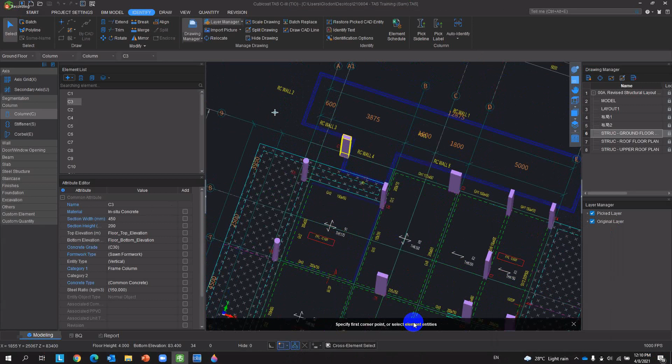Alright, if there are repeated columns, don't worry. If there are repeated columns, for example multiple C1, if there are multiple columns in C1, for example, let's say you have the sideline and everything is C1. You pick the sideline, everything is picked and also labeled together with C1. You are also able to pick it.

So you will only have one C1 in the element list, but in the model you have five elements. So you have five elements in one C1 area, five elements in the drawing, in the draw tab. But you only have one C1 in the element list because it reads your pick label name as C1. Alright? Don't worry, thank you.